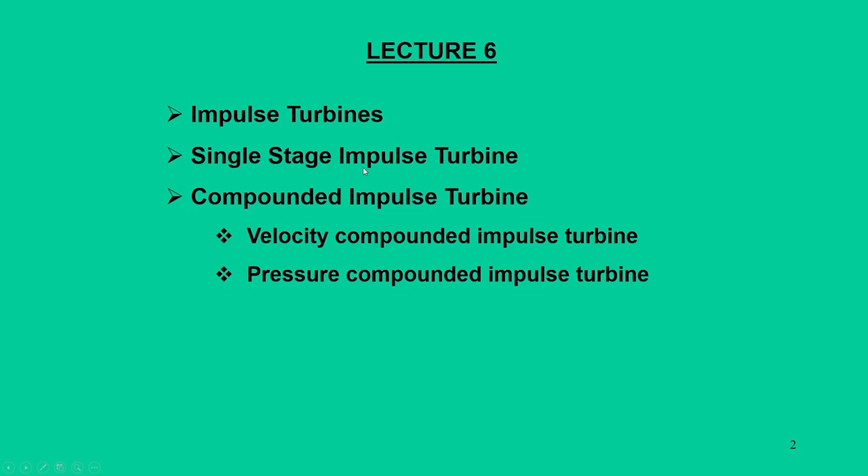For these reasons compounding is done, and this compounding is addressed by two configurations: velocity compounding and pressure compounding. So the topic of today's lecture will mainly focus on the practical aspects of impulse turbines, and subsequently how we utilize staging or distribution of enthalpy drop across each stage. This is the overall summary of today's lecture.

Now let us understand what we studied in our previous lectures. We proved that we started with a flat plate on which a velocity jet impinges. When the plate is fixed, there is no power output, but when we start moving that plate, we saw that we can get 50% of the power from the jet.

But instead of a plate, if we make curved blades, we proved that 100% power recovery from this velocity jet is possible. That is the basic principle, but in a realistic version, this single curved blade is replaced with an array of blades exposed to a fluid jet. These blades are rotating, and we get the velocity of the blade as Vb, and once we get this, this principle is adopted in some configuration or mode.

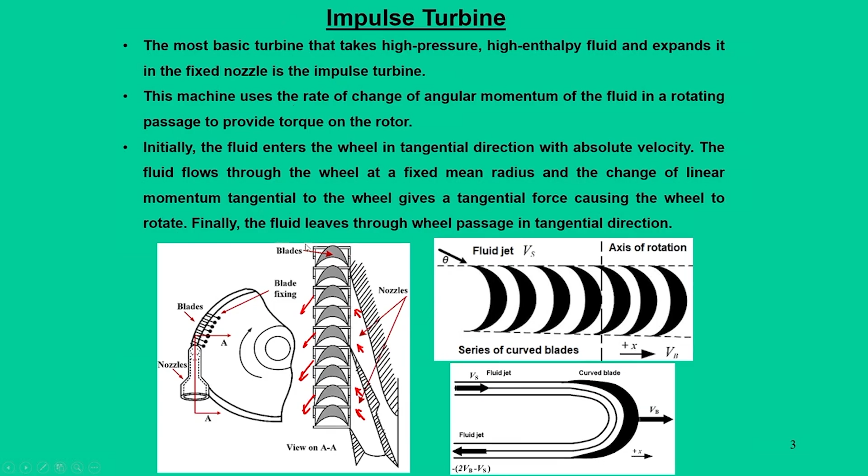These wheels continuously rotate as long as they receive steam from the nozzles, and finally the fluid leaves this wheel through the tangential direction.

Now, to give some insight into this impulse turbine in a realistic version: they are recognized by their shapes - looking at the shape of these blades, we can say it works on the impulse mode, and they have symmetrical entrance and exit angles of 20 degrees. Normally these impulse turbines are employed at the entrance of high pressure steam turbines when the specific volume of the steam is low, mainly in the superheated region. If you recall our Mollier diagram, that is the HS diagram.

So what we have seen is that when we are looking at this initial condition of the steam, that is state 1, they are in the superheated region, and this fluid expands from boiler pressure to the condenser pressure, typically about 30 bar down to 0.007 bar. Under this scaling difference, the steam is already at superheated conditions, and at these superheated conditions the point to be noted is the specific volume is low.

Another advantage is that these turbines require smaller flow areas compared to low pressure steam conditions. The blades of an impulse turbine are short with constant cross sections. The characteristic feature of the impulse turbine is that most or all of the enthalpy, and hence the pressure drop of the steam, occurs in the nozzles, that is the fixed blade passage that performs the nozzle action.

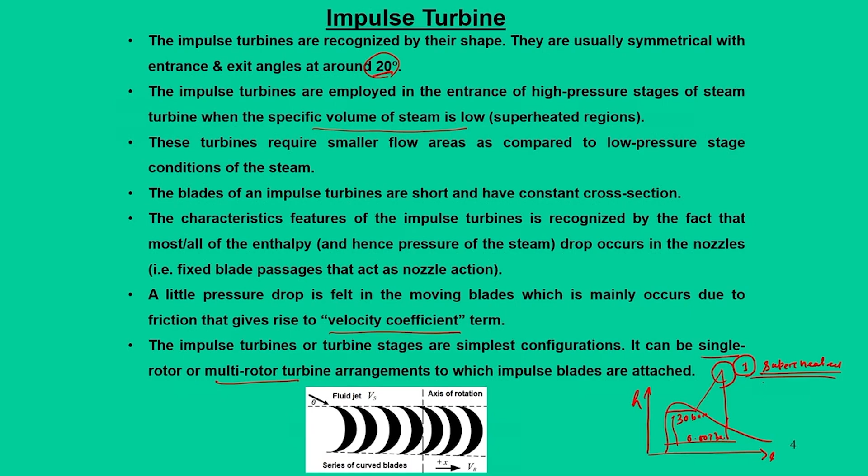The impulse turbines and turbine stages have very simple configurations compared to other arrangements. There can be a single rotor or multi-rotor turbine arrangements, meaning these blades can be connected either to a single rotor or a multi-rotor. When you have a single rotor, we call it a single stage. When you have a multi-rotor, we may have multiple stages. That is the idea of compounding.

Let us start with the first case, called single stage impulse turbines. From now on we will use the single stage impulse turbine as the benchmark, because this is the simplest version of the turbine that a conventional steam power plant uses. In steam power terminology, this single stage impulse turbine was the first invention, by a Swedish scientist, and it is called the De Laval turbine.

So we use the term De Laval nozzles, which are nothing but convergent-divergent nozzles used for generating thrust in nozzle terminology, but in turbine or power generation terminology we call it a turbine. If you look at this arrangement, these are the blades, a single stage array of blades, and the direction of rotation is shown here, giving us the blade velocity. Then we have a nozzle arranged in this manner.

In this figure, one particular nozzle caters to at least 4 blades. Likewise, if you have a large number of blades, you can think about multiple nozzles supplying steam to the blades, at a certain angle, typically kept within 20 to 30 degrees. We expect 30 degrees so that it caters to as many blades as possible.

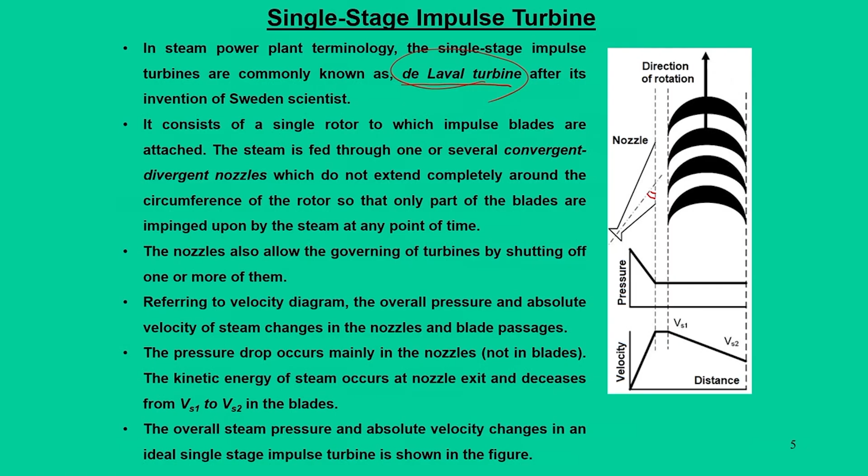Now we will move on to the next concept. A single stage turbine, in steam power terminology, is simply referred to as a de Laval turbine.

But when you go for compounding, the first question arises: why do you require compounding? Normally in modern boilers, where steam generation takes place, we look at pressure availability of around 160 bar. At the same time, temperature may also be very high, close to 300, 400 or 500 degrees centigrade. Now such high pressure steam, when it expands to a condenser pressure of maybe 0.07 bar or up to atmospheric, there will be enough loss. That means if you use a single stage mode like a de Laval mode, there will be significant loss, meaning we are not capturing the maximum amount of power from the energy available in the steam.

Second, from a turbomachinery point of view, there is a limit to the speed at which blades can rotate. Typically for a steam velocity of around 1640 meters per second, which may be available at 160 bar, the optimum blade velocity, which is half of this, would be about 820 meters per second. Rotating at 820 meters per second is a difficult task. For these reasons, if you use a single stage mode, the system will be bulky, and it will also give rise to a lot of losses, so that is normally avoided.

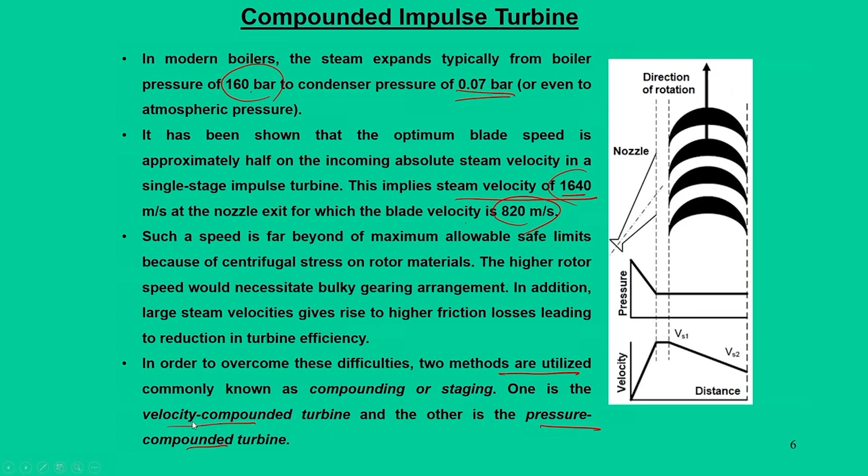So to overcome these difficulties, two methods are normally employed: velocity compounding or pressure compounding. Basically the word compounding means staging, that is, whatever enthalpy or energy is available in the steam, you stagger it into stages, and compounding means nothing but different stages. This is the method adopted to minimize these losses. So there are two possibilities: velocity compounding and pressure compounding. Let us see what they mean.

Let us stick to velocity compounding impulse turbine first. Typically when the idea of compounding comes into picture, scientists try to find out possible configurations or arrangements for how we can achieve it. They came up with some designs, and one of the most important, usable from a practical viewpoint, is the Curtis turbine. It was proposed by Charles G. Curtis while employing the staging of turbines through the impulse principle. So we call that a Curtis turbine. When you say velocity compounded in steam power terminology, we say Curtis turbine or Curtis stage.

So what he says is that we can have a Curtis turbine which is composed of one stage of nozzle as a single stage turbine followed by two rows of moving blades. The arrangement is such that there are two rows of moving blades with one set of stationary blades. The main philosophy is that when the fluid passes the blades, we want to reduce the velocity as low as possible.

To do that, we adopt the same concept through rows of moving blades, but these rows of moving blades have to be fed in a particular manner. That is the reason stationary blades are incorporated. Many books interpret these stationary blades as guide vanes, meaning they have no active role, but rather the exit from the first stage of moving blades is redirected to the entry of the next stage of moving blades. Many books call these guide vanes, but in our terms we say these are stationary blades because they do not rotate, though they function like a guide vane.

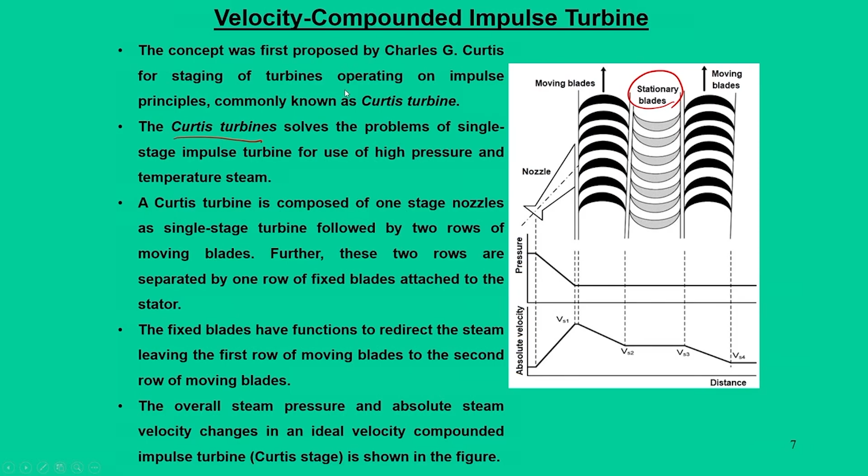Now if you make the drop in velocity in a step by step manner, or do it in stages, it is possible, and thermodynamically it is proved, that maximum utilization of energy is achievable. This is the concept behind Curtis stage turbines. By default, a Curtis turbine is a velocity compounded impulse turbine.

Moving further, let's analyze this in terms of velocity diagrams. This particular figure shows the schematic diagram of the inlet triangle and outlet triangles, and this is the first set of moving blades shown here. The moving blades have the same velocity Vb. The first stage of moving blades moves at this velocity Vb, and in the other case also the same velocity Vb.

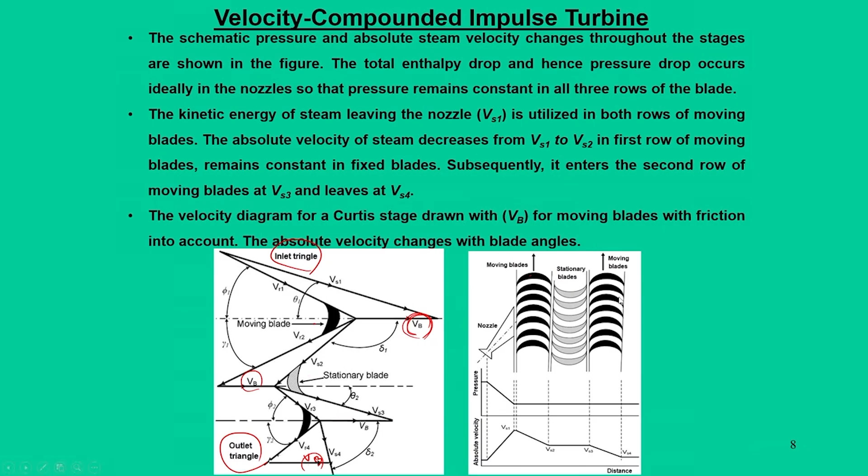Now, one more important factor we've emphasized here is that there are possibilities of a drop in the velocity of the fluid in this velocity diagram. For example, in ideal conditions, Vs2 and Vs3 are equal. Vs2 is the velocity that leaves the first stage of moving blades, and Vs3 is the entry velocity for the second stage moving blade.

So we can introduce the term velocity coefficient, or Kv, which takes care of this ratio, allowing us to quantify the amount of fluid that enters. This means we can precisely say what velocity the steam enters in each row of moving blades.

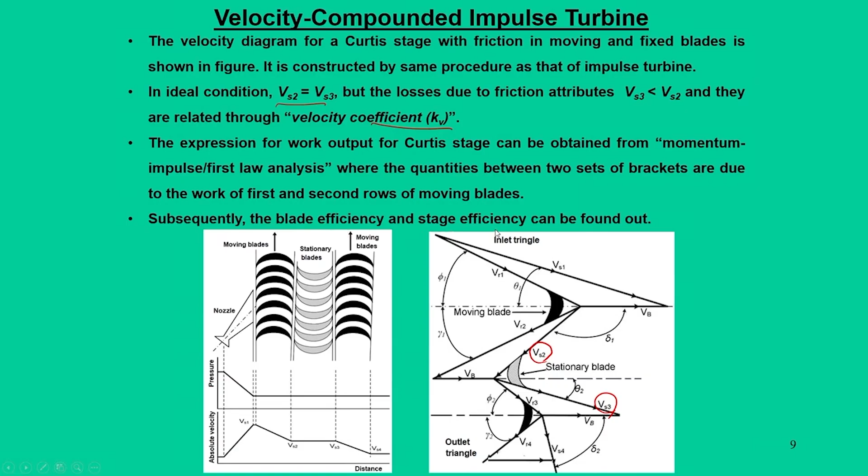Now once we have everything, we can calculate the work transfer by impulse and momentum principles. Then, of course, we can calculate the blade efficiency and stage efficiency in the similar manner as done in our last lecture. Just to give the mathematical insight about the work output from a Curtis stage.

This is the general expression: if you recall our previous lectures, our work transfer was derived such that work output from an impulse blade is m dot by 2 into the bracket Vs1 square minus Vs2 square plus Vr2 square minus Vr1 square. For the time being, if you just ignore this term right now, and if you have only one set of blades, this is the work output from the blade.

What happens is that if you have a pure impulse mode, the relative velocity terms will become zero. So we say that this work output is only from the pure impulse mode.

In this case, since we have two sets of moving blades, each of them will have velocity triangles. In the first case, we have a velocity triangle which involves Vs1, Vs2, Vr1 and Vr2. In the second case, we have Vs3, Vs4, Vr4 and Vr3.

So this work gets added up, that means we are recovering the work in a staged manner, and this gives a higher power output. So this is how the Curtis stage of recovering power from the steam is all about.

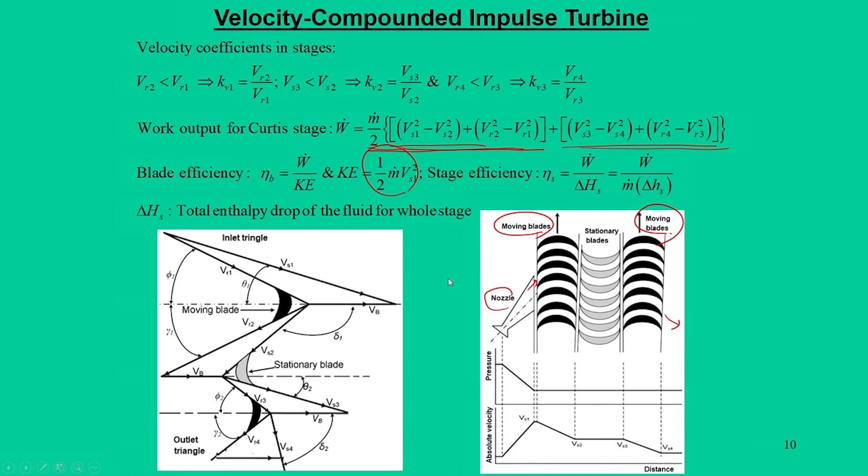Now, using the same philosophy, we can extend it for any number of rows. So earlier we had only two sets of moving blades and one set of stationary blades. Now we are coming to a case with three sets of moving blades and two sets of fixed blades.

So the same way, we start with Vs1, Vr1 which enters, and which leaves as Vr2 and Vs2, and this gives a blade velocity Vb. For the next set of moving blades, it is Vs3 and Vr3 entering, and it gives blade velocity Vb. Then for these two, we have Vr4 and Vs4, giving velocity Vb, and subsequently when you go to the last one, it is Vs5 and Vr5, giving Vs6 and Vr6.

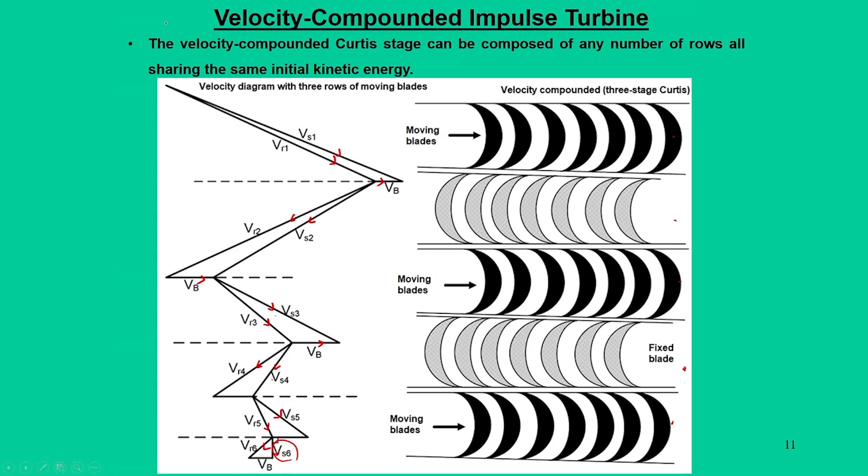So how long can we continue this? When this velocity which is impinging - if you see, its magnitude becomes very less. In a realistic way, if you draw the vector diagram appropriately, you can see that the magnitude of Vs6 is quite low. That means you have captured maximum energy from the fluid because its magnitude has reduced substantially. So if we have Vs1 as the initial value, finally Vs6 becomes an insignificant number.

So to think about some kind of realistic mode, we are basically using n stages to extract the power. Ideally speaking, one can think of n number of stages. If there is just one stage, then the optimum velocity that gives maximum power would be Vs1 cos theta by 2, which we have already derived. Now if you have n number of stages, meaning n number of rows of moving blades, then the optimum velocity also gets reduced.

That means for the same energy extraction, we can operate with a lower blade velocity. Same power can be extracted at lower velocity. So this is the advantage that we get when we do velocity compounding through Curtis staging.

What other advantage, or maybe geometrical advantage, do we get? When you do the staging with successive increase in blade angles, that results in flatter and thinner blades. That means as we go towards the last row of blades, it becomes thinner because there is no significant steam velocity available at that end. So that gives an advantage.

We can say that exit velocity can be brought down close to zero for ideal power generation systems, and through these stagings we can extract the same power with relatively less blade velocity. Now, when you go from highest to lowest pressure stages, typically when you say the ratio 3:1, we call it a 2 stage Curtis.

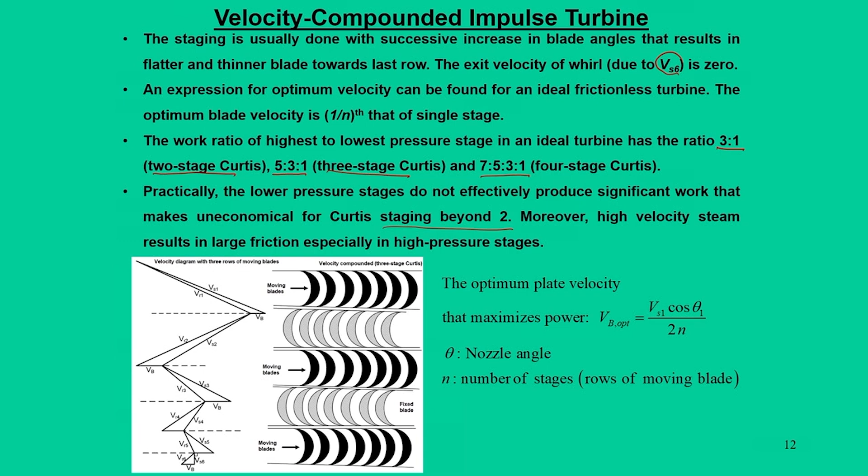So then what do you do? We go for the next alternative, which is pressure compounded impulse turbines. Here the compounding is done in a similar way, but we have availability of steam at very high pressure, superheated pressure, and we are going to extract its power through compounding.

So here the entire idea is, if you want to do pressure compounding, how do you do it? Velocity compounding tells us that Curtis stage beyond 2 is not economical, and at that point the blade speed at 2 stages is also too high. So the issue of high blade velocity in a single stage turbine is resolved by incorporating nozzles in each stage, so that the enthalpy drop is divided into many single stages.

So basically, pressure compounding is a method in which each moving blade is associated with its own respective nozzle. That means the same nozzle will not supply fluid to all the moving blades; rather we will have different nozzles for each set of moving blades.

Now if you do that, how does it work? It works in a similar manner: if you look at this set of moving blades, it starts with some pressure, there is a pressure drop in the nozzle, and across this moving blade there is no pressure drop. It continues, and when it goes to the next point, the same fluid exiting is being fed to the next nozzle.

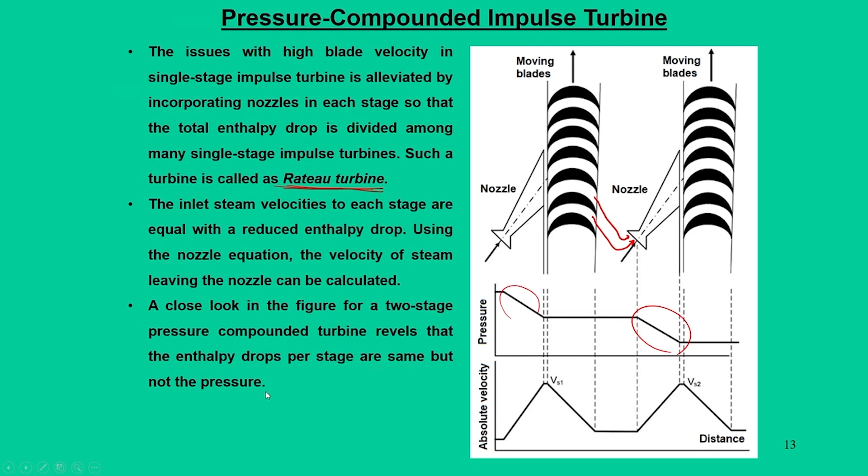To give more emphasis on how you need to think about this in realistic numbers: suppose you have steam available at 70 bar, 800 degree Kelvin, and it has to be expanded to condenser pressure of 0.07 bar, carrying a certain enthalpy. We can divide this enthalpy into 3 or 4 stages, which comes to about 337.5 kilojoules per kg, but we can think of this happening at different pressure drops.

In the first stage we can have a 45 drop in pressure, then 18, 6 and 1. So instead of going to 0 velocity, we are going close to atmospheric pressure. This is how the requirement is set.

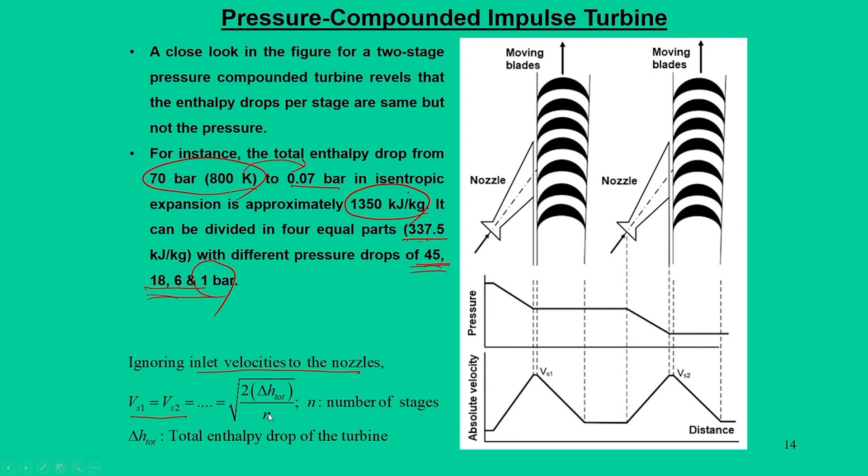In this process, the inlet velocities to the nozzles can be calculated from the nozzle equation, a simple nozzle equation, as twice the total enthalpy drop divided by n, where n stands for number of pressure stages. This gives a complete clear picture of how staging is done in pressure compounding mode.

You see here, for each row of moving blades there is a fixed set of nozzles, and each one we call stage 1. For stage 2 there's another set, for stage 3 another set, and likewise pressure compounding is done.

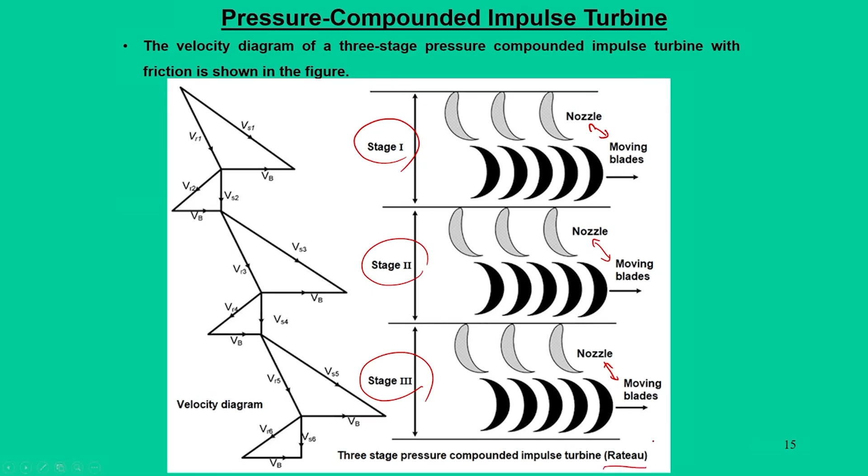So, each of these can be viewed as a single stage impulse turbine, and correspondingly their velocity diagram is drawn. This turbine we call a Rateau turbine. The significant point to emphasize is that the exit velocity of whirl for all the stages is 0, which corresponds to optimum blade velocity.

The nozzle of each stage receives steam discharged from the previous stage, expands it, and redirects it to the moving blades. This is the main philosophy behind pressure compounding of the impulse turbine.

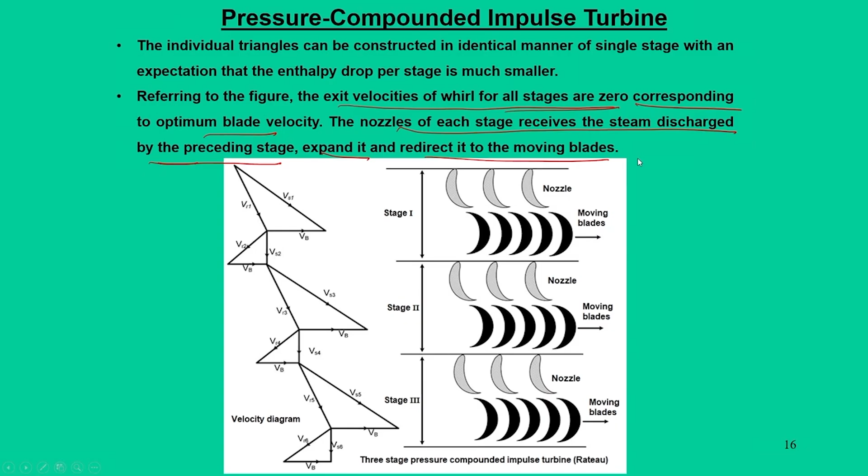If you look at the advantages, there is reduced blade velocity in each stage, because the nozzle for each set of moving blades will have a different entry velocity. There will also be reduced steam velocities, hence friction, and equal work among all stages.

These are the advantages, but the disadvantages are unavoidable steam leakage and a large number of stages. So when you go for a large number of stages in pressure mode, there will be unavoidable steam leakage. Unless efficiency is the priority, we do not go for higher stage pressure compounding.

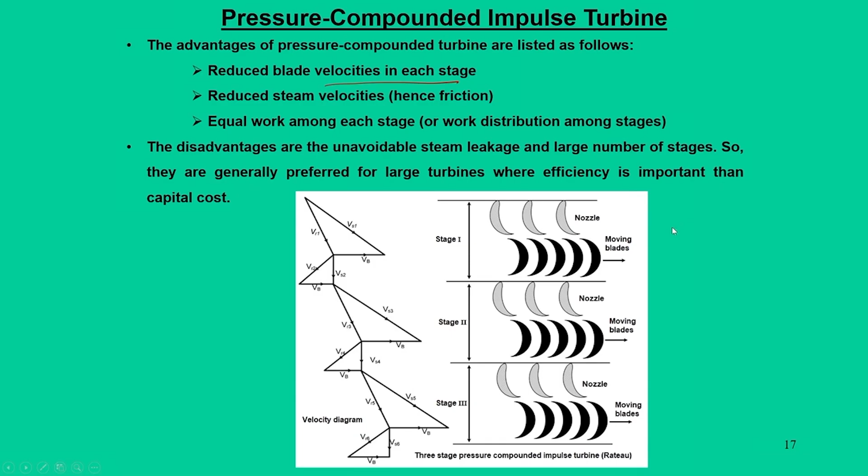Rather, we are satisfied with at least a 2 stage Curtis mode of velocity compounding. If efficiency is more important than capital cost, then probably pressure compounding is the better approach. This concludes the theory of compounding under the impulse principle for steam turbines.

Now we will try to solve similar numerical problems based on our discussion today. In our previous lecture we had similar problems, but here it is proposed to have the problem based on the stages. Basically, the problem is based on an impulse turbine which works on a number of pressure stages.

So we mean this is a pressure compounding type impulse turbine, which means each stage will have its own sets of nozzles and moving blades, and we need to concentrate on one particular stage.

One thing we've seen is that when talking about a number of stages, the enthalpy drop is divided equally among the stages. So we can assume equal enthalpy drop per stage, meaning each stage gives an equal amount of work. With this assumption we will proceed with solving this problem.

Our attention will be focused on only one stage, and for that stage we are going to draw the velocity diagram. Since it is an impulse turbine, the velocity diagrams are concentrated with respect to one particular blade, which will have an inlet triangle and an outlet triangle.

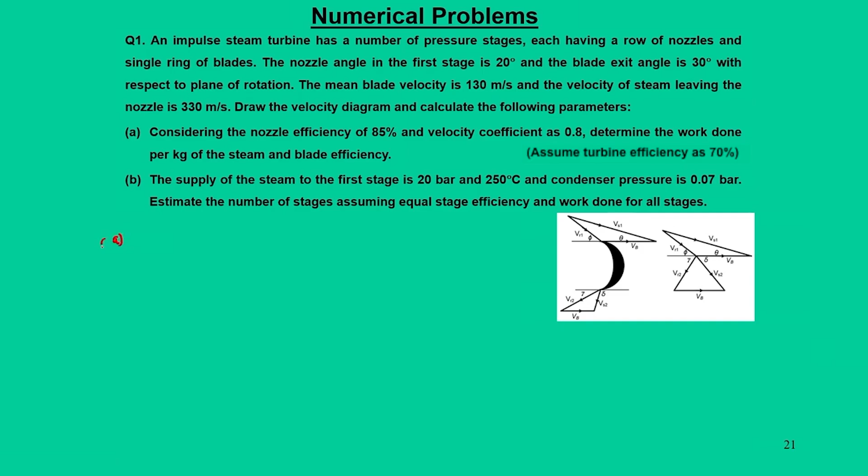Then going to blade efficiency, W dot by M dot is 42.64 kilojoule per kg, and blade efficiency eta blade is W dot by M dot divided by Vs1 squared by 2, that is 2 into 42.64 into 1000 (since it is kilojoule) divided by Vs1 which is 330 meter per second into 330. This number comes out to 78.3%, so blade efficiency is 78.3%.

Now for the second part, the steam at the first stage is 20 bar, 250 degree centigrade, condenser pressure is 0.07 bar. Basically we have to find out the enthalpy drop. For that we have to draw either the enthalpy-Mollier diagram or temperature-entropy diagram.

You can see the steam available and the drop that takes place, from 1 to 2s to 2. So enthalpy drop for part B: this is 20 bar, 250 degree centigrade, and this is 0.07 bar. Finding 20 bar 250 degree centigrade from the steam table gives H1 as 2902.3 kilojoule per kg, and in this process, had it been isentropic, we would have S1 equal to S2S, that is 6.6546.

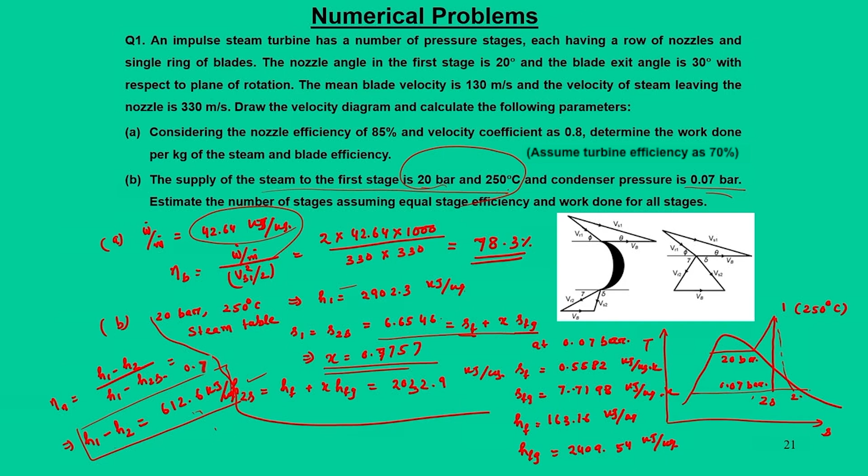Basically, the steam available at 20 bar and 250 degree centigrade has to drop this much enthalpy to arrive at the condenser pressure. But our work done per kg of steam is about 42.64 kilojoule per kg, which means per stage we are able to recover only 42.64 kilojoule per kg.

This means the number of stages, by assuming equal stage efficiency and work done for all stages, would be the ratio of delta H total divided by delta H per stage, that number being 612.6 divided by 42.64 per stage. This comes to approximately 15 number of stages.

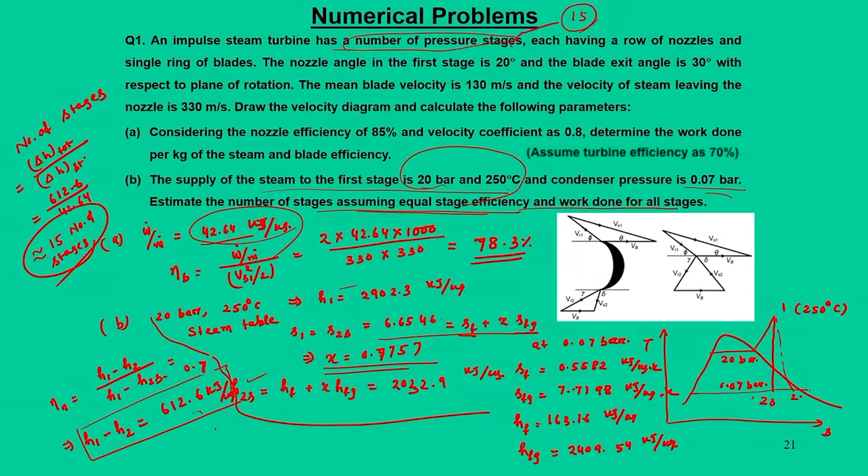Hence we require 15 number of stages to drop about 612.6 kilojoule per kg enthalpy of the steam by equally dividing them with work output as 42.64 kilojoule per kg. So ultimately we say that this number of stages is 15, meaning 15 stages are used, and it is nothing but a pressure compounded impulse turbine. With these discussions, thank you for your attention.